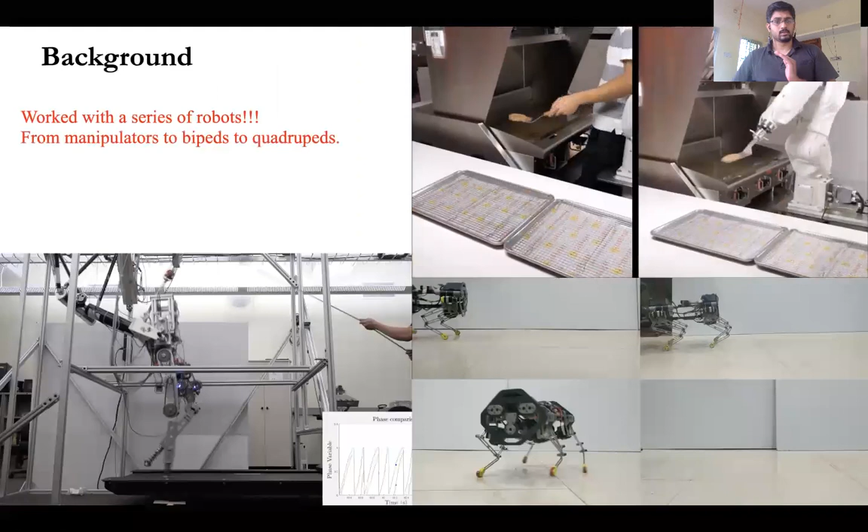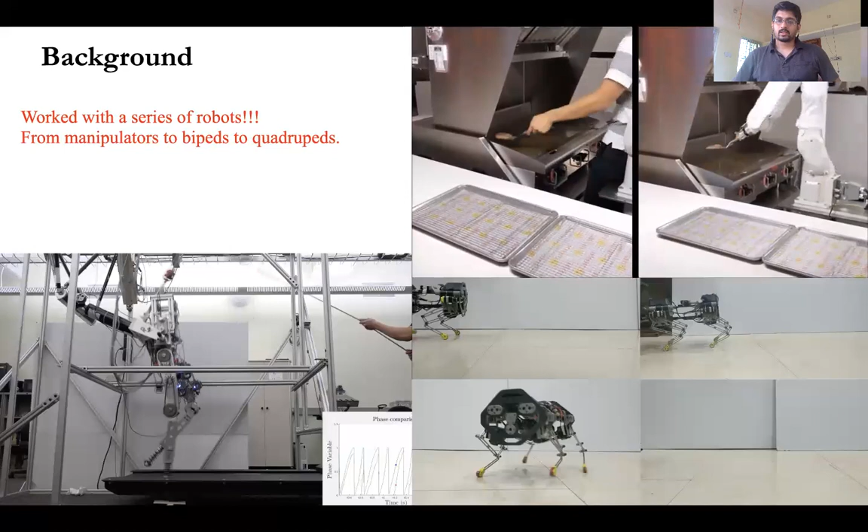So I've done a lot of work on a series of robots, from manipulators to bipeds to quadrupeds. The video on the right shows a 6 degree of freedom manipulator transporting burgers from one point to another, and not only that, it's able to flip burgers, and the comparison between the human and the robot is to show that it's remarkably human-like.

At the bottom left, we have this little running robot, which was developed in Georgia Tech. Here the goal was to achieve stable running, and we did that by realizing trajectories at the joint level and tracking them.

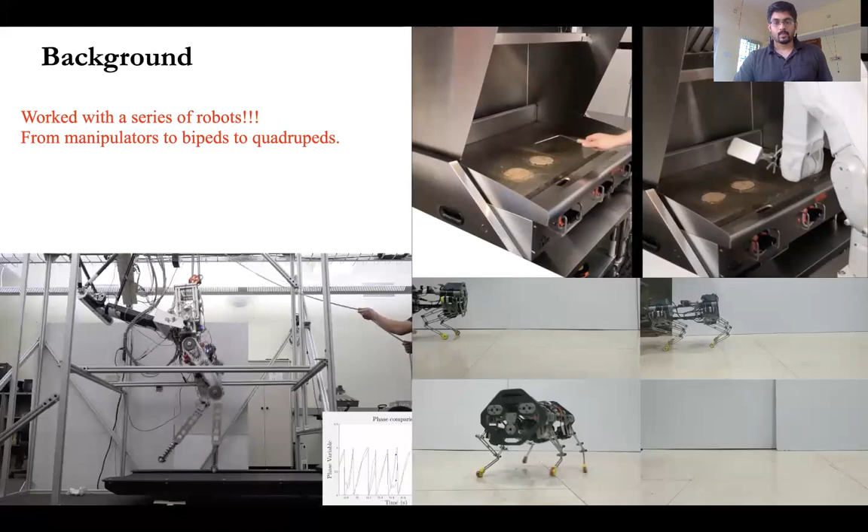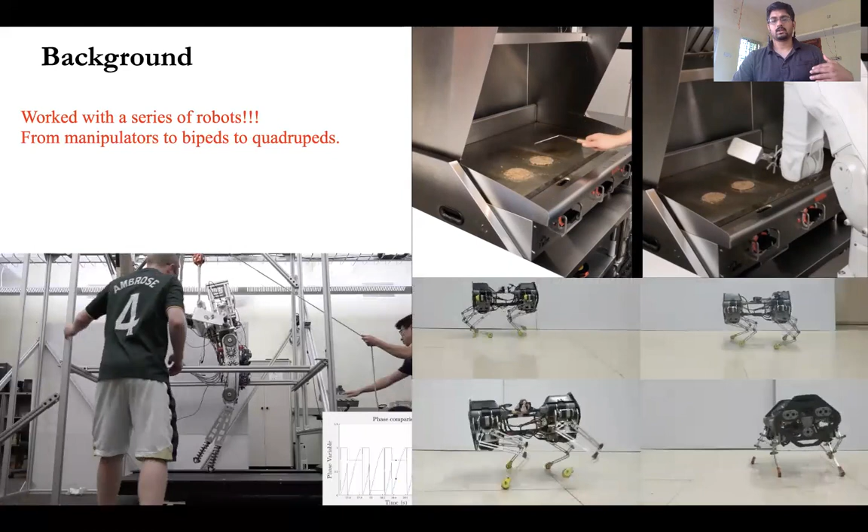Similarly, on the right-hand side, we have this quadruped called Stoch, developed at IISC, where I'm currently working. Here the goal is to realize a library of behaviors like trotting, walking forward, walking backward, turning, and sidestepping. So all in all, we have quite a few robots here, and there is something common in them.

That is that we track trajectories at the lowest level by using either PD control or a PID control law. So PID control is everywhere.

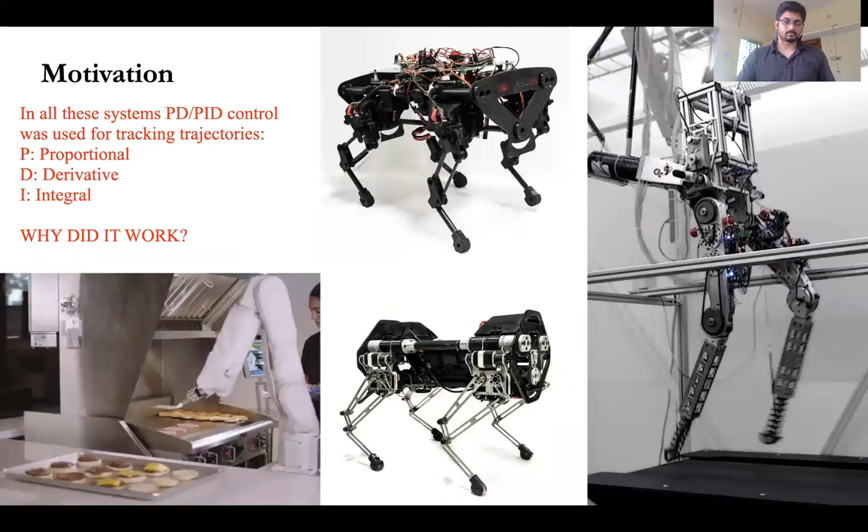In fact, it's used even in drones. And according to a recent survey by the industry committee on the current and future impact of PID control and advanced control technologies, the acceptance rate is very, very high, which is 91%. So the impact is very high.

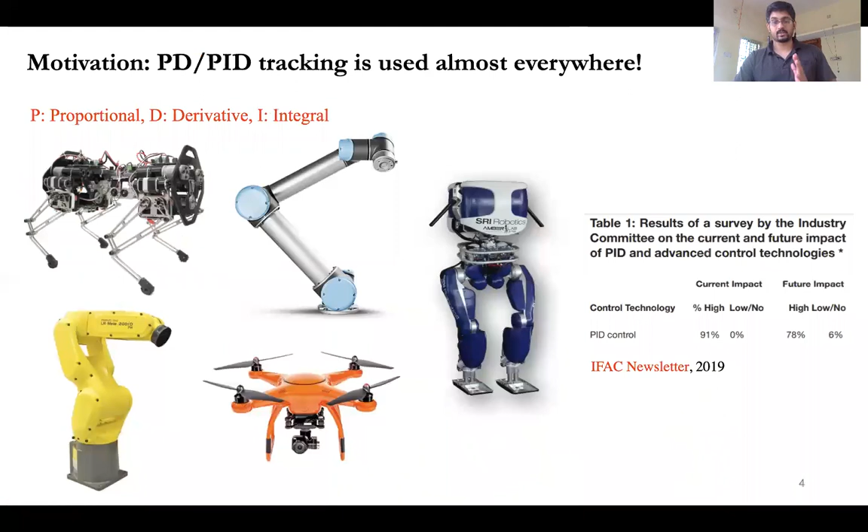But the question is, what kind of guarantees are there? Does PD control provide tracking guarantees in robotic systems? Short answer is no, and certainly a bigger no for underactuated systems.

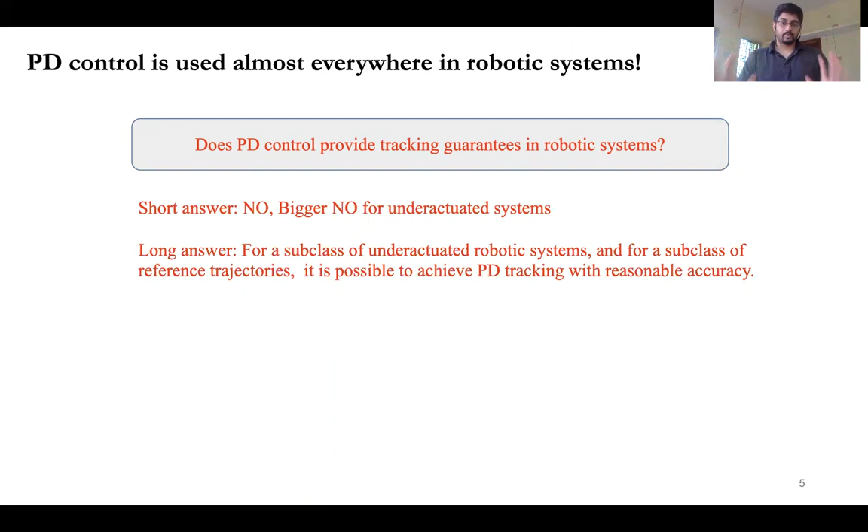But the long answer is for a subclass of underactuated robotic systems and for a subclass of reference trajectories, it is possible to achieve PD tracking with reasonable accuracy. And that's what the goal here is: to provide some kind of stability guarantees for PD controlled underactuated robotic systems.

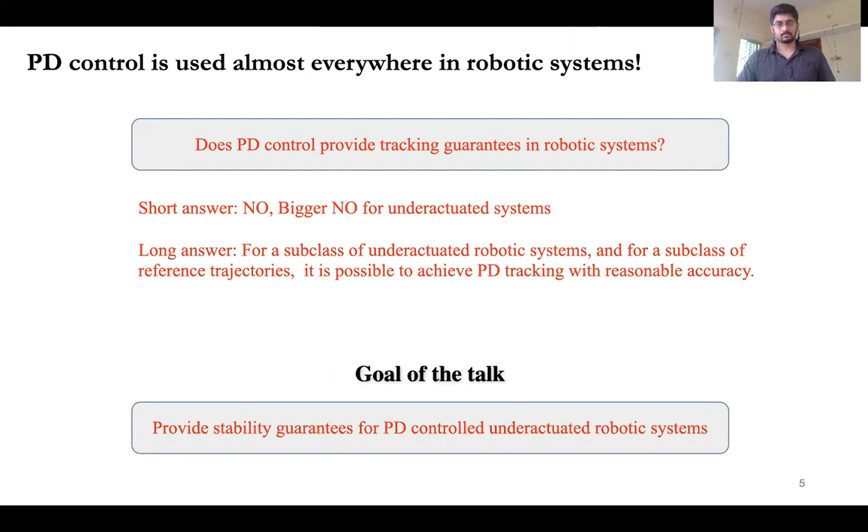So this is the outline of the talk. It's divided into two parts. First we will look at existing work, focusing on what PD control is and what has been established so far. And then we'll finally focus on the main results of the paper.

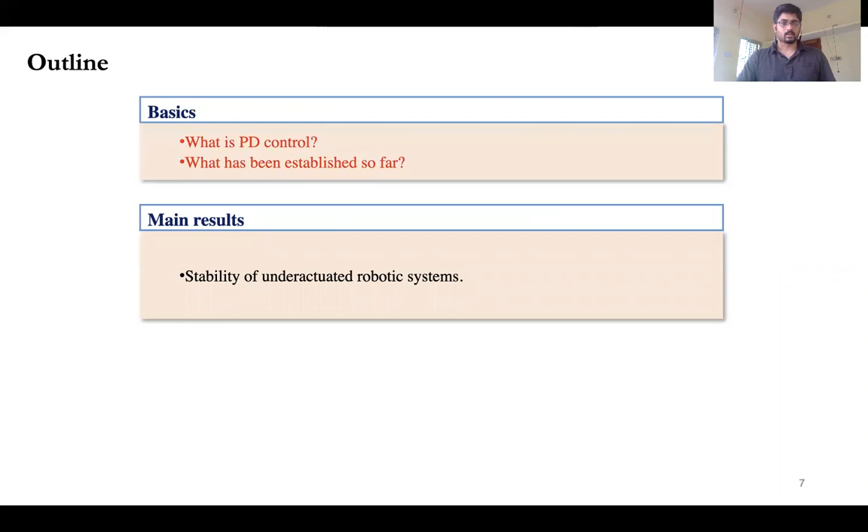Okay, so what is PD control? Let's consider an n degree of freedom serial manipulator like the one shown on the right. So we have different types of matrices: the inertia, the Coriolis centrifugal term, the gravity term, and the torque U that is being applied for each and every joint.

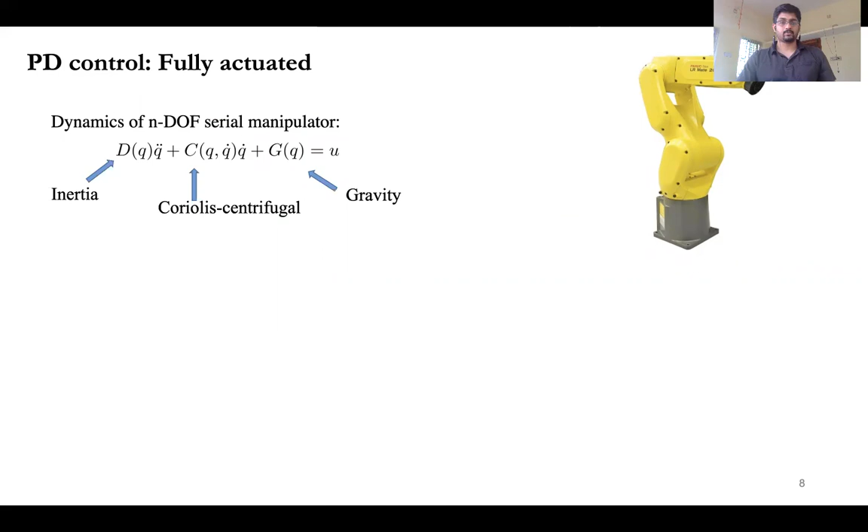They have some interesting properties. For example, D is symmetric, positive, definite. And let's say, given the desired configuration QD, if I would like to reach this set point QD,

I would like to apply this control: we have the proportional term, the error term, the derivative term, and the error dot term. So this is PD control. This is model free, intuitive, and very easy to implement.

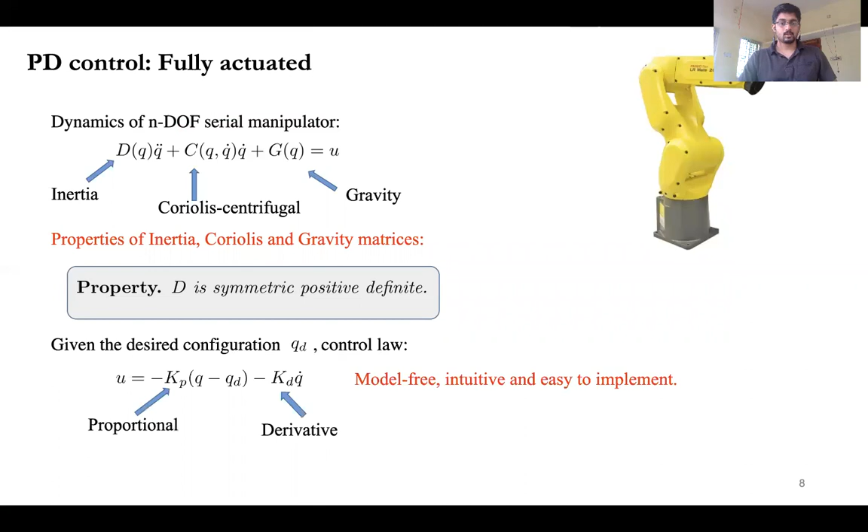Now, as always the case for robotic systems, we use Lyapunov functions. It's all about picking the Lyapunov function. We can think of V as something proportional to the error, and because V dot is negative, error is decreasing as a function of time.

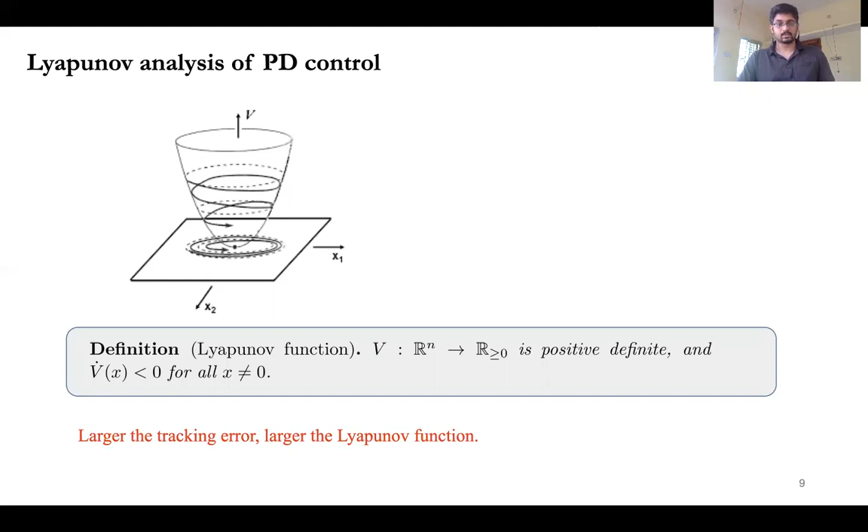So we have asymptotic stability. So it's all about finding that Lyapunov function for this PD control system.

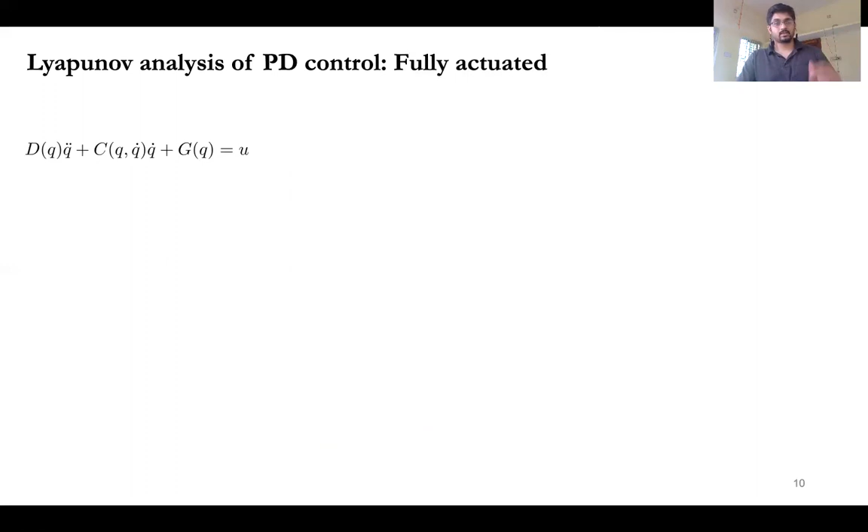So in order to understand this, let's simplify this a little bit. Let's remove the gravity terms and consider a PD control law. The goal here is to achieve asymptotic stability: in other words, driving X to 0, Q should go to QD, Q dot should go to 0.

And we can pick this candidate Lyapunov function. So it has the error term with the Kp, and it has the kinetic energy term. So it is a sum of two terms. We can actually think of it as a potential energy like function and a kinetic energy function.

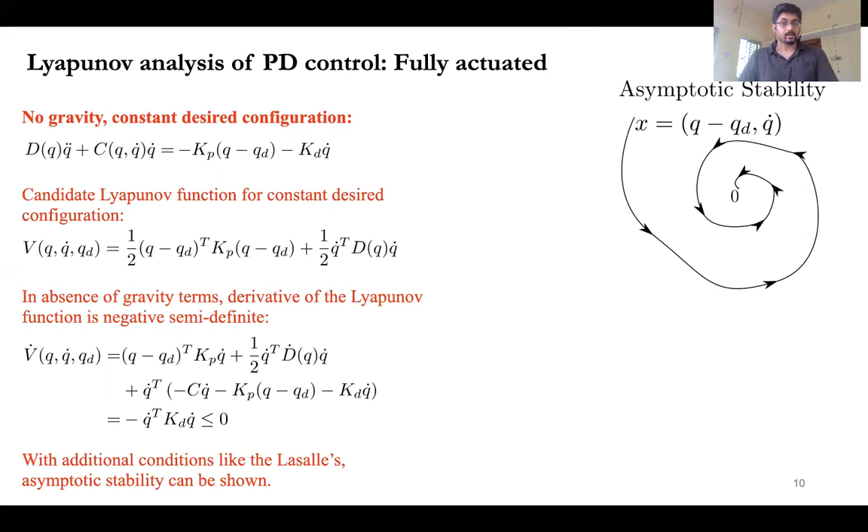And what's interesting is that when we take the derivative, we get this expression, and with additional checks like LaSalle's, we can show asymptotic stability, right? And in fact, this kinetic energy enabled us to do something of this type.

So we can now generalize this. We can now talk about time varying desired configuration with the gravity included. So we now have QD of T instead of QD. It is dependent on time, and accordingly we have

QD dot of T. So we have error and error dot, so we have a PD control law. And it's not really possible to achieve asymptotic stability, but what we can do is talk about ultimate boundedness. In this case, we can actually talk about exponential convergence to an ultimate bound.

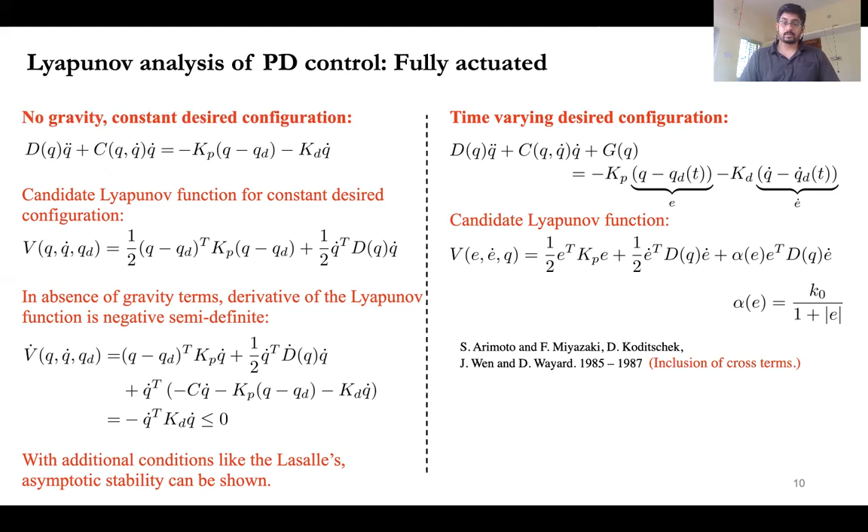So we have the setting where we have a manipulator with a PD control law, and we have this candidate Lyapunov function where we would like to show ultimate boundedness, exponential convergence to an ultimate bound. For this to happen, we need additional assumptions, which are actually not restrictive. So we have some inequalities required to be satisfied.

For the first one, on the D dot, C, and G, which are the model matrices for the robot. And we have assumptions on the desired trajectory. It has to be differentiable, and Q dot and Q double dot should be bounded for all time.

Like I mentioned, this is not really restrictive. In fact, a large body of robotic systems satisfy assumption 1. For example, a cart pole satisfies this, but a pendulum slider mechanism, which is not really commonly seen, does not satisfy this. Our systems are mainly of the type shown on the left.

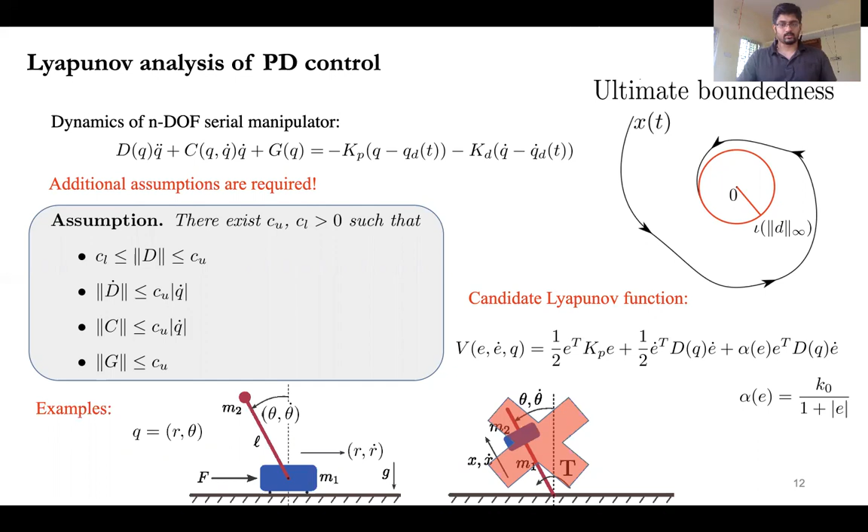Given this result, we would like to establish stability of underactuated robotic systems. So when I say underactuated, I'm referring to a mapping matrix here, which is like a tall matrix. Here, the dimension of the input is less than the degrees of freedom of the system.

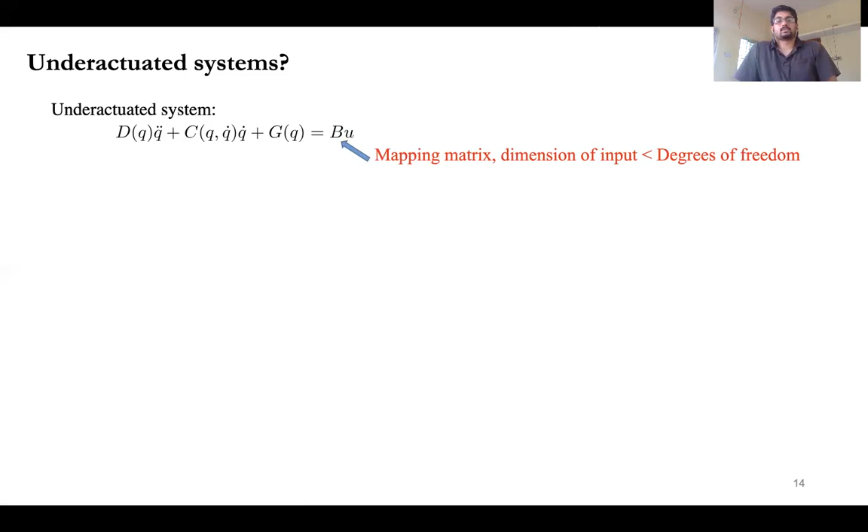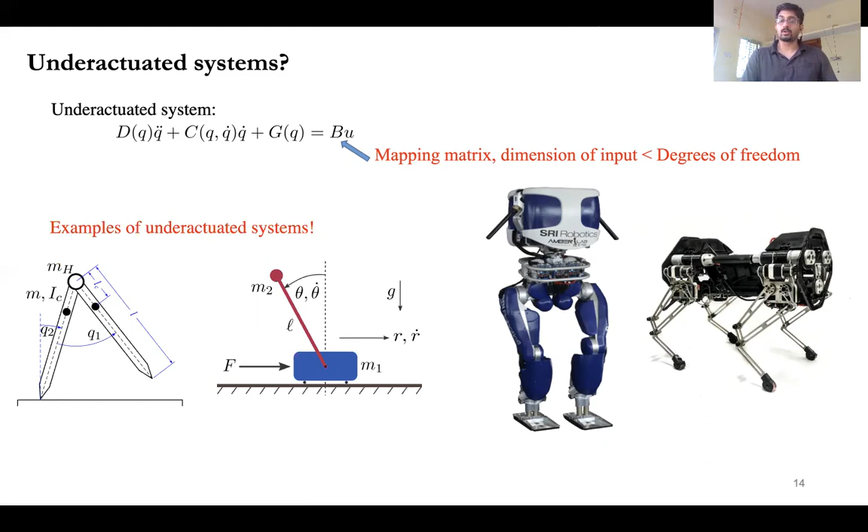And there are quite a few examples. Like I mentioned before, a cart pole satisfies this — it's an underactuated system. We have the compass gait, and we have walking robots, which are also classic examples of hybrid underactuated systems. And I have a very similar result on PD control, stability of PD controlled walking robots, where we have used some assumptions on the hybrid zero dynamics.

In this paper, we would like to provide guarantees irrespective of the properties of the zero dynamics. And that's where the difference lies.

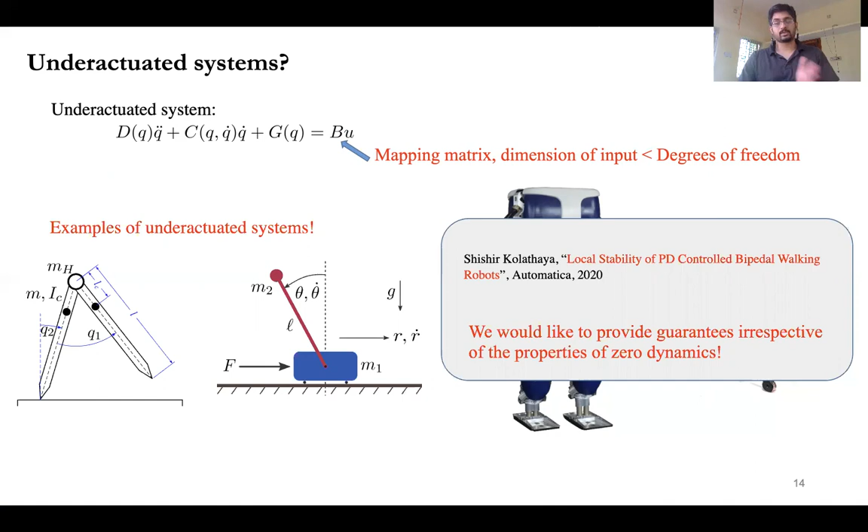So in order to understand this better, let's try to look at a cart pole system. Here the cart is actuated, that's why there is a force acting horizontally, and we have a pole which is not actuated. So the pole needs to be driven to a vertical position — the goal is to drive theta to 0.

What we can do is actually separate the dynamics. We can remove R double dot by using row 1 and substituting row 2, and we get an equation of this form. On the right-hand side, we have this mapping from the force applied to the cart to the pole dynamics. For me to apply any meaningful control to drive the pole to 0, we cannot have this term be 0 on the right-hand side.

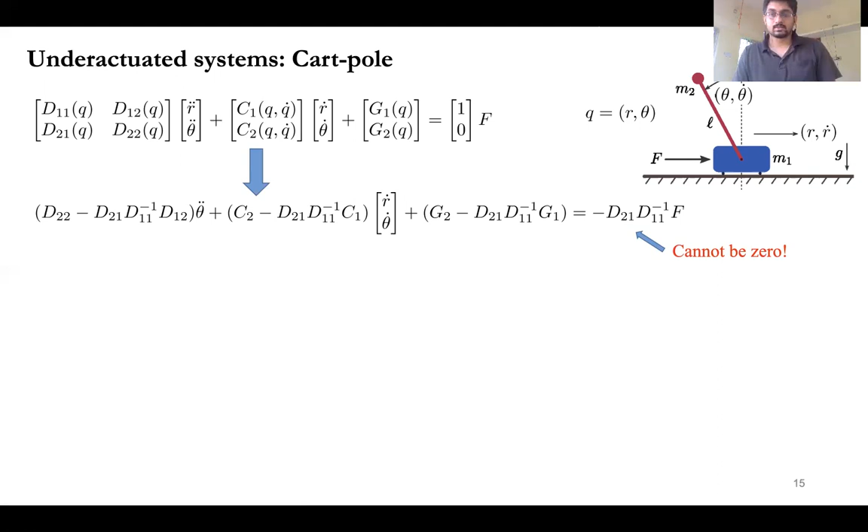In fact, this is the mapping from the force to the pole dynamics, so it cannot be 0, which means our results are restricted to a subset of states of the system. But because our control law is very simple, a PD control law, we are still okay with doing this. So we can talk about local boundedness of the pole, but not for the cart position.

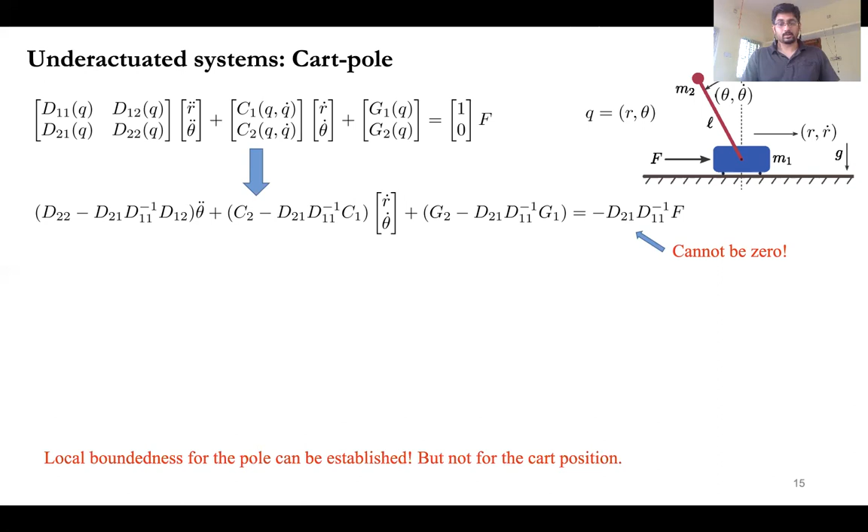In fact, the results shown in the paper ask for the pole only, or for coordinates similar to that of the pole — these are called the shape variables. And those coordinates which are not of interest to us are the external variables.

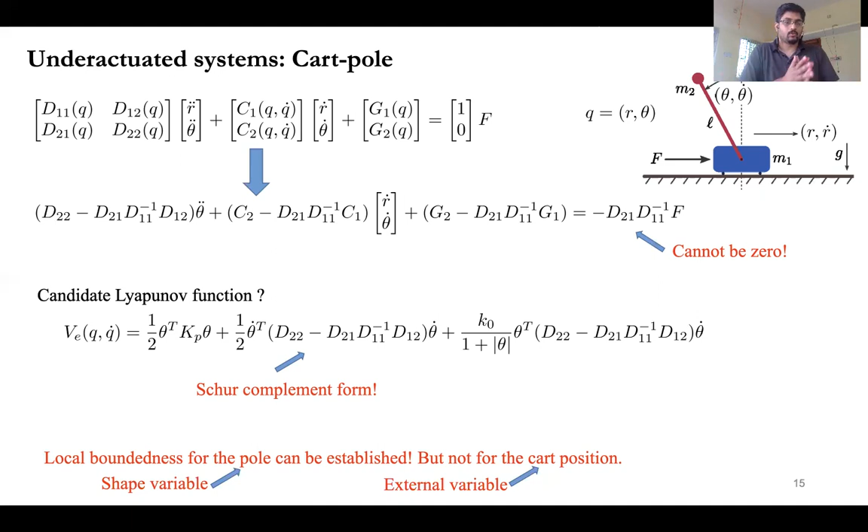So we establish boundedness — we actually establish convergence to a specific bound for any arbitrary interval for the shape variables only, which is actually sufficient for a lot of the use cases.

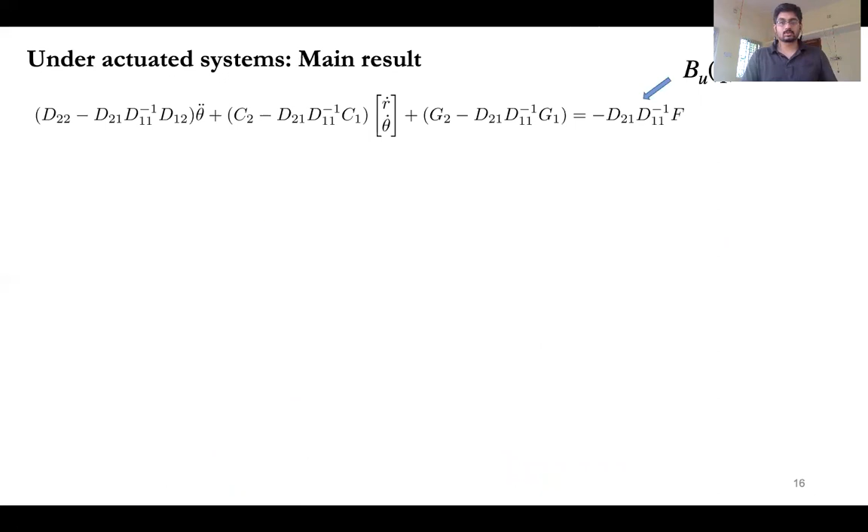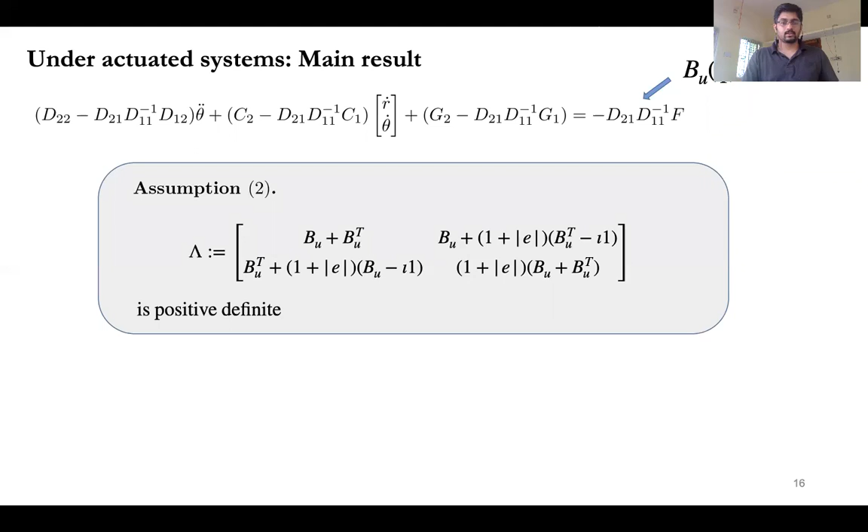We can also generalize the mapping from the force to the pole dynamics, which is called B_u here. We can derive a term called lambda, which is a function of B_u and e. As long as lambda is positive definite, we have this result. So for any arbitrary interval, we can talk about local convergence to a bound.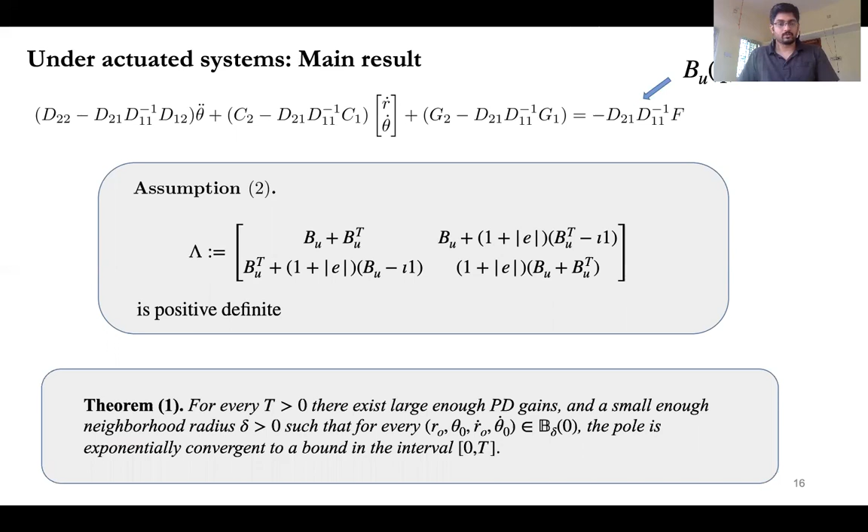So in this case, for any arbitrary interval, we have convergence to a bound in the interval 0 to t, for any starting point within the neighborhood. We need a small enough neighborhood.

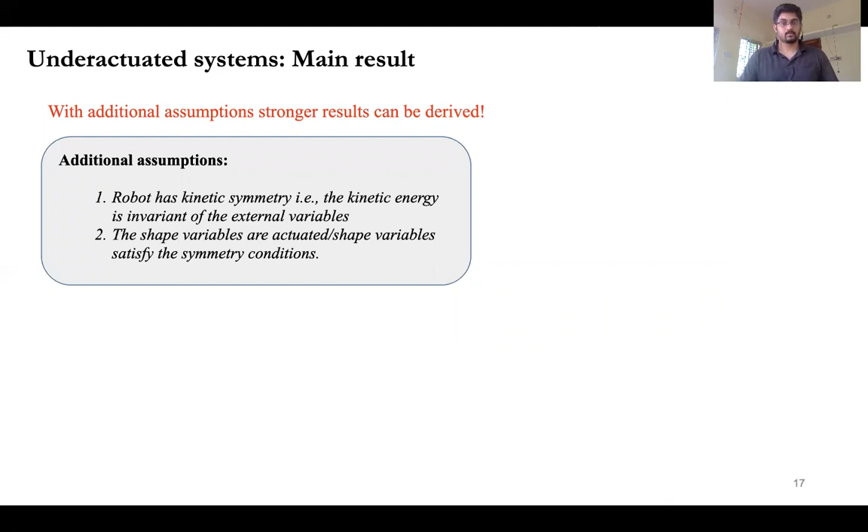We can make this result stronger with additional assumptions, which is the main result in the paper. These assumptions are based on the kinetic symmetry property. If the robot has kinetic symmetry — in other words, the kinetic energy is invariant of the external variables — and the shape variables are actuated, and if they're not actuated, then they have to satisfy the symmetry conditions. If these two conditions are satisfied, we can come up with stronger results.

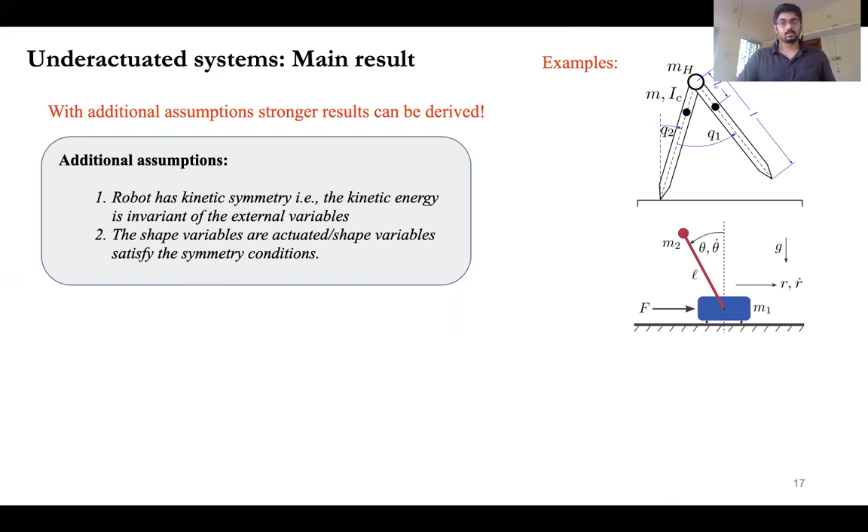And these are not really restrictive again. In fact, the examples shown on the right satisfy these conditions, these assumptions. More details about this are in the paper.

So for a system of this type, we can strike out the local requirement. We can talk about any arbitrary initial state given that lambda is positive definite, and we can talk about exponential convergence to a bound for any arbitrary interval t.

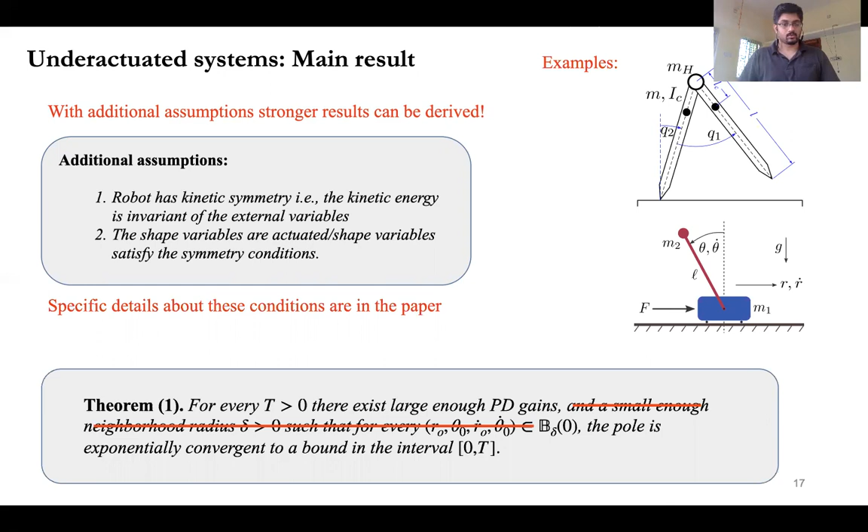So with this, I'll conclude. I established local boundedness of tracking error for any arbitrary time interval for the class of underactuated robotic systems. With additional assumptions like kinetic symmetry, we showed stronger results. Note that we have not used any assumption on the zero dynamics, and future work will involve studying PID control and QP formulations of PID tracking.